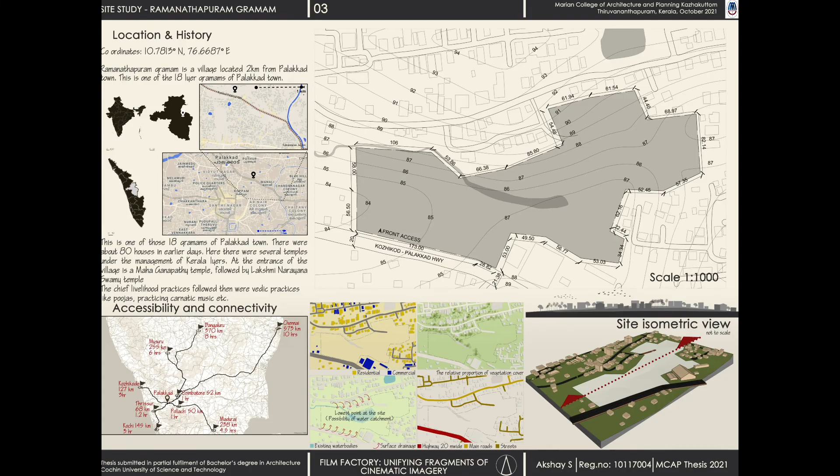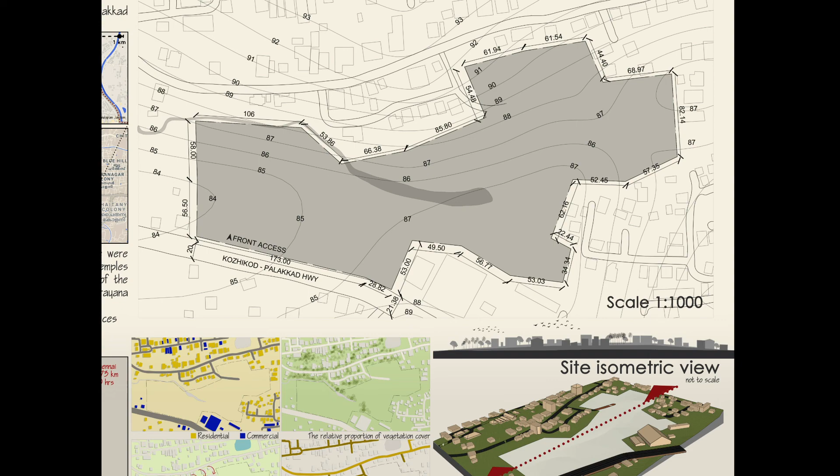Moving through the various layers of the site, the major land use from this area is that of residential as we move north and south of the highway, and those near the highway are commercial outlets, particularly vehicle workshops, warehouses, storage units and so on. All the barren land around this region is covered with grass, and the only shrub to tree vegetation found in this area is that of residences. The site happens to be at the lowest point within the region. There is a presence of a small water body at the center of the site, which is a micro catchment of water.

Considering the circulation around the site, it is accessible from the southern and northern sides. The entry on the southern side is the primary entrance adjoining the highway, and the entry on the northern side is the service entry to the site. Looking at the micro context of the site, the Iyer village is presently the residential commercial mixed use area.

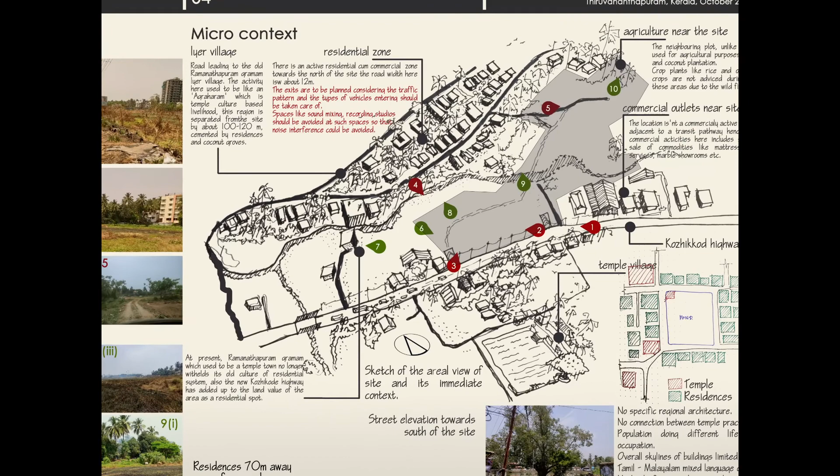These areas are 100 to 120 meters away from the site, which used to be an agraharam having a temple settlement. The active residential zone that replaced the Iyer village leads to the service road onto the site. The road is about 12 meters wide here. The exits are placed considering the traffic through the road.

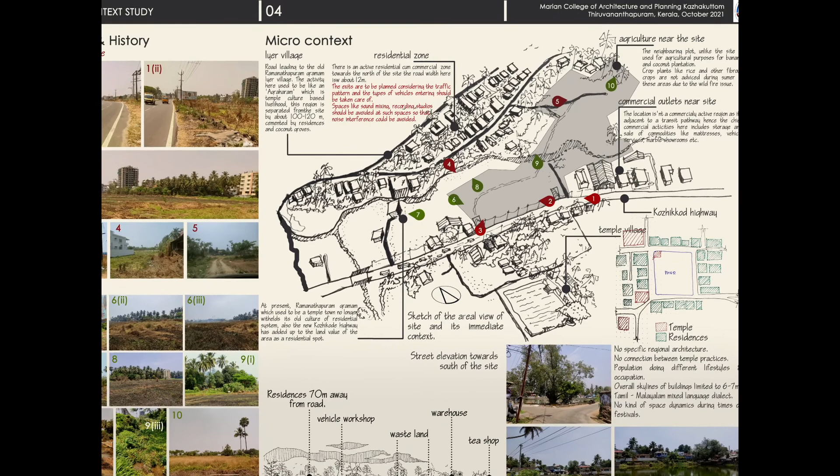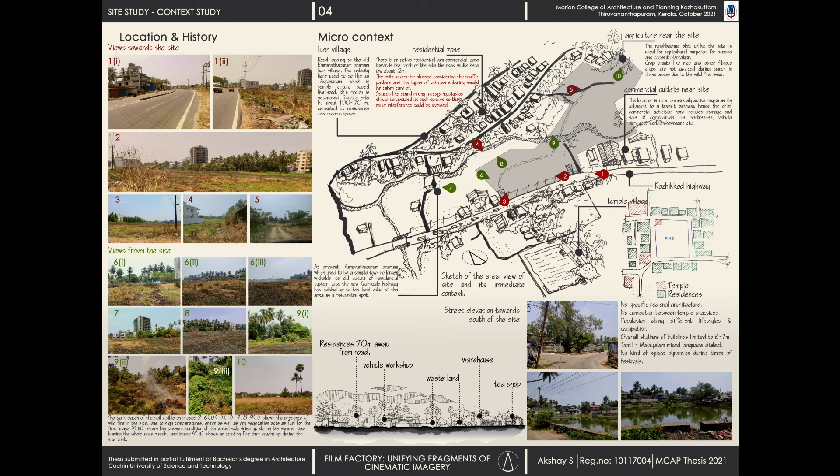The edge conditions to the northeastern sides are defined by agricultural fields that primarily grow banana plantation and coconut groves in it. These don't have a specific boundary. The street edge to the south of the site is shown in sketches that show the pattern of commerce in the region. The active temple town to the south of the site is about 135 meters away from the site, and the housing layout here is arranged around the temple pond. These areas don't follow a specific architectural pattern. The images numbered in red show the views towards the site and green shows views from the site.

Now, considering the climatological aspects of the site, the dominant wind direction is west-southwest with an average wind speed of about 60 to 80 km per hour. The counter direction gives the local winds of breezes at lower levels. The openings are placed based on this. The general climate of Palakkad follows a hot and dry pattern. The average temperature around this site is 30 to 35 degrees Celsius. During hot summers, the grasslands catch fire. The vegetated areas tend not to catch fire.

The sun study shows the area receives lighting to a level that it could be used for solar power generation for the facility's use. The pattern of shading also has been found based on sun study. From all the site-specific data and analysis, I arrived at the strength, weakness, opportunity and threat of the site. The strengths were easy road access to nearby major cities that host movie production, and the presence of nearby local movie shooting locations within 5 to 60 kilometers.

The weaknesses were the climate and atmospheric conditions that are hostile considering human comfort. The temperature soars as high as 40 to 50 degrees Celsius in peak summers. The fifth slide shows the extent of the fire caught in the grasslands over the peak summers. The opportunities were the views of people nearby the site. The region is commercially less active, although the potential to harness various cottage industries is more. Such a project in this region might act as an urban plug-in that awakens the transit pathway.

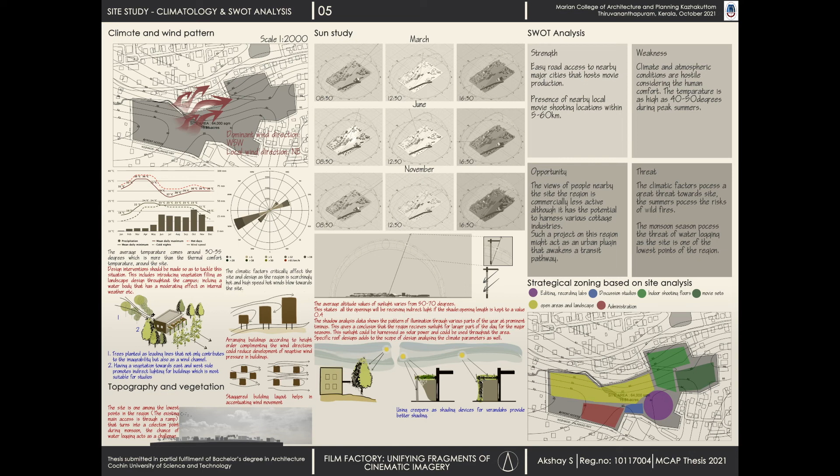The threats to the site are again the climatic factors, which pose a great threat. The summers pose the risk of peak wildfires, and the monsoon season here poses the threat of waterlogging as the site is one of the lowest points in the region. The strategic zoning based on site analysis is as shown in the figure.

Now moving on to the case studies, each case study was done based on certain aims and objectives. These were divided as film cities and film studios based on their designs. Ramoji Rao Film City, Hyderabad, designed by architect Nitish Roy, is the largest film city in the world. The aim of studying this project was to understand the site zoning, tourism management and cinema shooting within the facility. The image shows the site zoning. The spaces are presented in order of circulation followed by a tourist user visiting the facility.

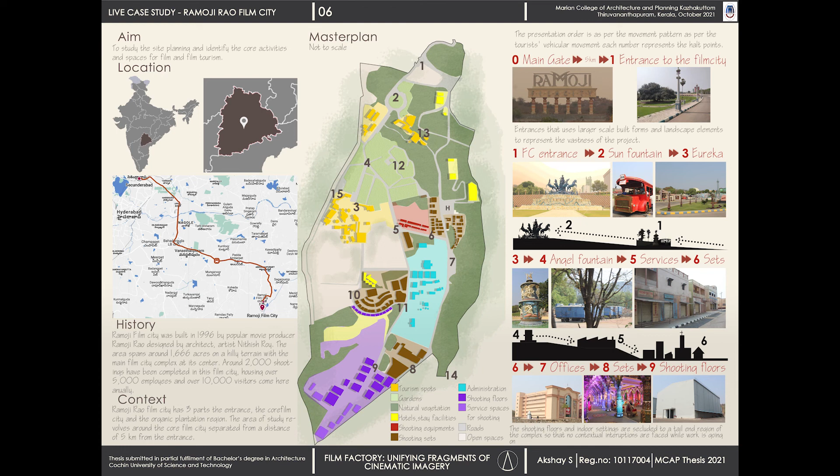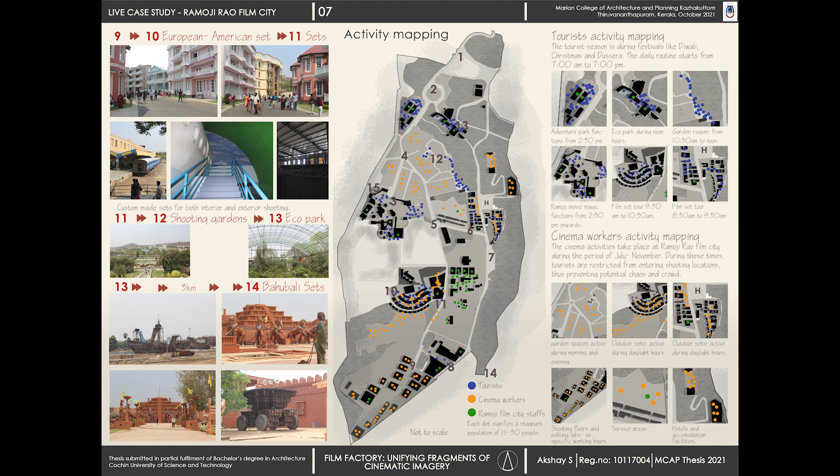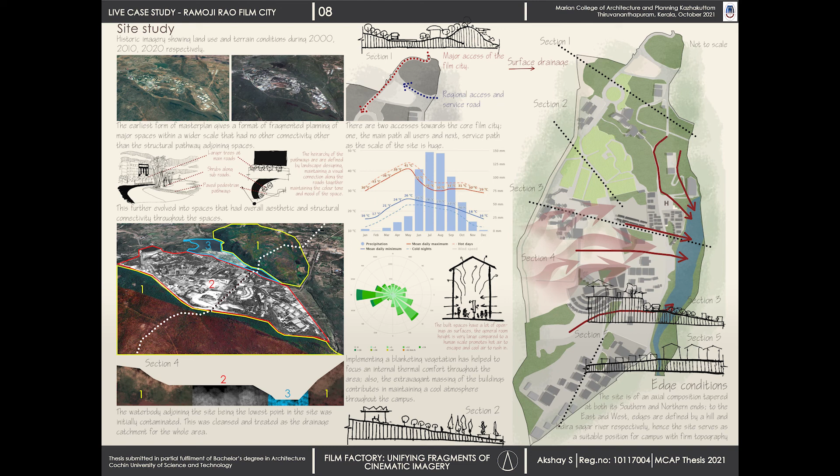Moving on to the spatial analysis, the exterior spaces studied were the gardens and the landscape designs, which acted as a venue for both shooting and tourism. Each of the landscaped areas within the campus has multi-visual access so as to facilitate the movie shoot as well as improve the tourist visual experience. The gardens were made from different gardening styles across the world. Considering the interior spaces, the indoor shooting venues were studied, which had fixed design parameters like height, services and structure.

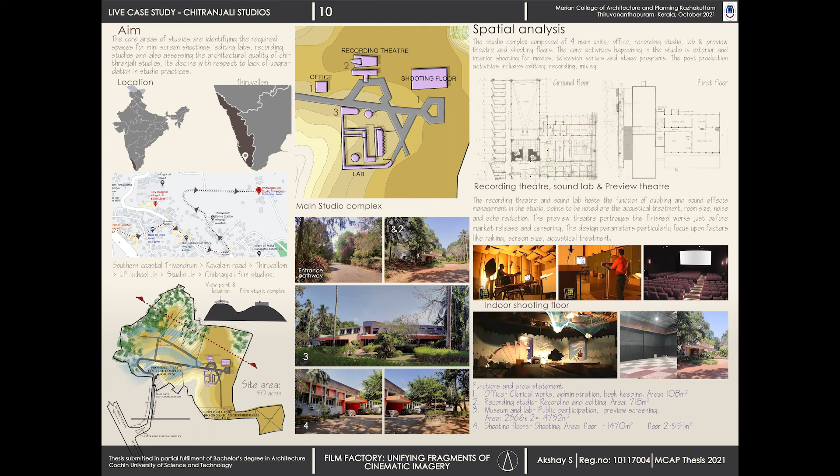The third case study, Disney IM Digital Studio, situated in Novato. The core idea of this project was to study the subunits of post-production that included color labs, VFX studios, concept studios, dark and light spaces for editing. Also, the circulation system for this project showed a pattern of presentation which is used in the main design.

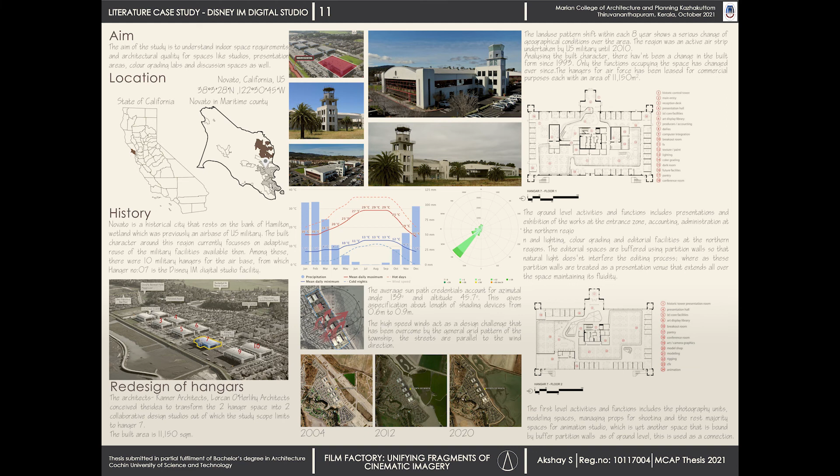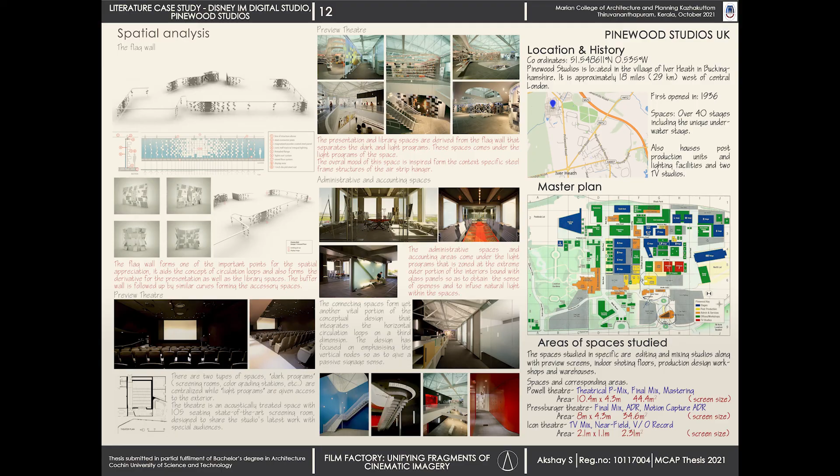The next case study, Pinewood Studios UK, helped me to understand the requirements and services of indoor shooting floors. Pinewood Studios deals with indoor shooting and post-production that is much similar to my project brief. It consists of different types of shooting floors, editing and recording studios based on each requirement. Each of these requirements were studied and the spatial requirement in terms of quality and quantity were separately assessed.

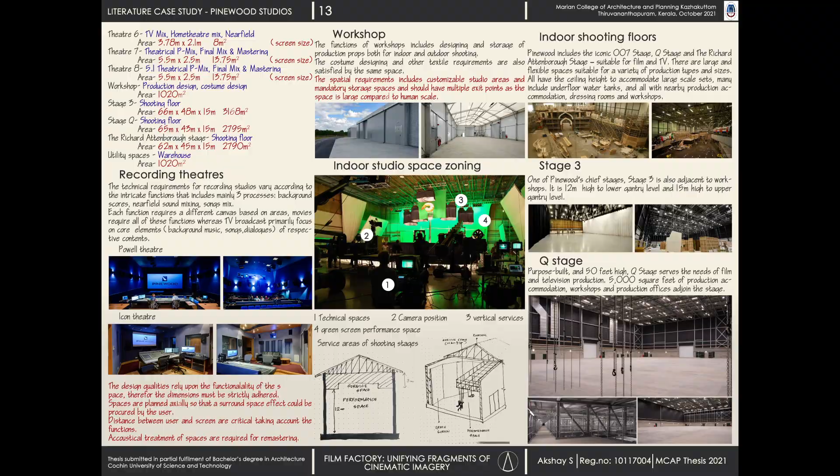The second film city under the case study, Dada Saheb Chitranagari, Mumbai, or rather known as the Mumbai Film City. The aim of this project was to study the site zoning and identify the range of mini-screen activities for a film city. The key functions and scale of projects done in Mumbai Film City are as follows. The facility hosts mainly two functions. These are film tourism and exterior and interior shooting of movies and mini-screen programs.

The infrastructure facilities include exhibition venues, shopping spaces, restaurants, accommodation facilities, about 40 outdoor and indoor shooting sets, 16 indoor shooting floors, editing studios, dubbing, sound mixing studios and offline office spaces. About 520 acres of land consisting of hills, valleys, plateaus, natural forest, bushes and wetlands. The overall zoning pattern is based on a linear pattern where the individual spaces appear as branches from a central avenue pathway.

The last case study, Prayag Film City, Kolkata. The aim of studying this project was to identify the site zoning and identify the range of mini-screen activities for a film city. The film city hosts two main functions, which are film tourism and exterior cinematography. The general planning and zoning of the whole campus is based on a radial zoning concept, where the key idea is segregating spaces that diverge from a central node.

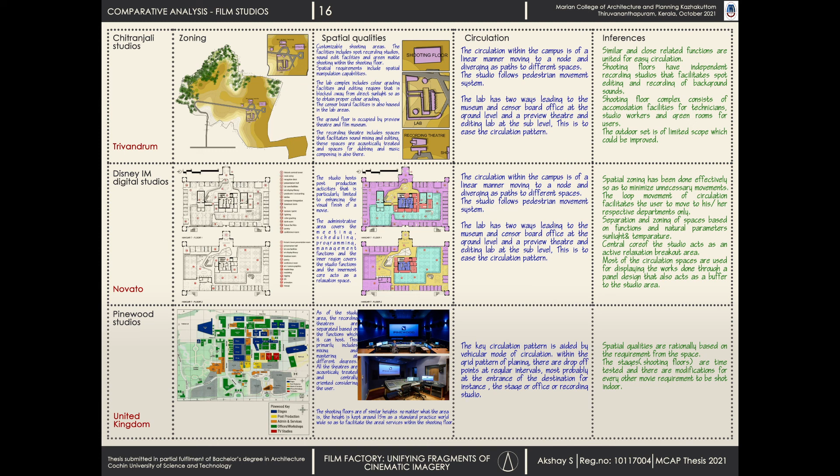Coming on to the master plan, as the figure shows, the site is divided into levels 83.5, 85, 87, 88 and 89 meters above sea level. The lower levels, which are to the west side of the site, contain spaces for pre-production and post-production, with spaces 1, 3, 4 as administration building, post-production facility and concept studio.

This level has its landscape counterparts as 5, 18, 17 as the central node garden, maze garden and agricultural area respectively. The vehicular parking is shown in green and vanity parking is shown in violet shades. The total parking slots required for the facility as per KMBR is 55 for the post-production facility, 10 for the administration office and 25 for accommodation.

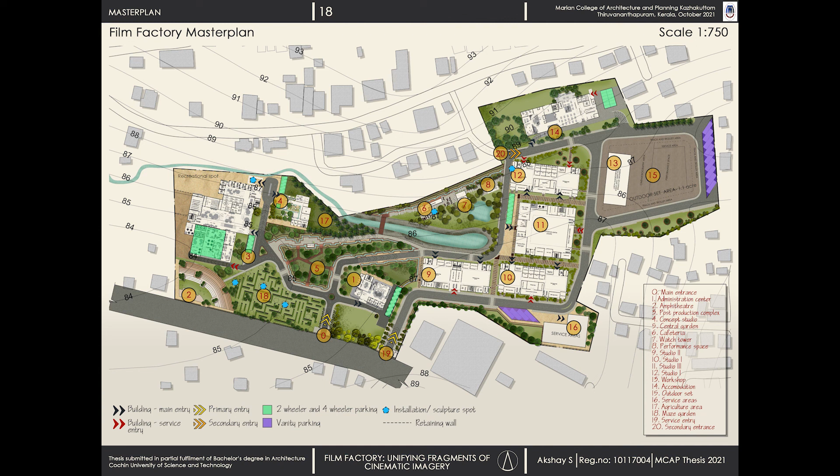The shooting floors coming under the industrial building are attached with a common parking lot towards the east side of the site. The upper levels of the site are zoned for the production area for the shooting floors and accommodation facility. Getting in detail to the zoning layers, firstly the landscaping scheme was followed up by 3 gardening styles: the maze garden, the central node garden and the forest landscape.

The pedestrian pathway connecting all the spaces, the built and the unbuilt ones, is staggered at regular intervals so as to attain numerous different architectural frames, which is part of the special topic. Coming back to the gardens, the maze garden is a gardening scheme inspired from the 1980 Kubrick movie The Shining. This was intended to give a surprise, revealing to the viewer a set of installations within the garden. From its functional point of view, it leads to the amphitheater performance venue.

The central garden is a nodal garden that separates the car and pedestrian pathway. This was designed understanding the significance of a focal point in a campus. The forest landscape connects the pond and the shooting floor. It forms the main trail along the site area. Hence, the truck route was zoned at the peripheral region of the core campus. The car and pedestrian pathway is interlinked until the post-production facility, which then splits into two.

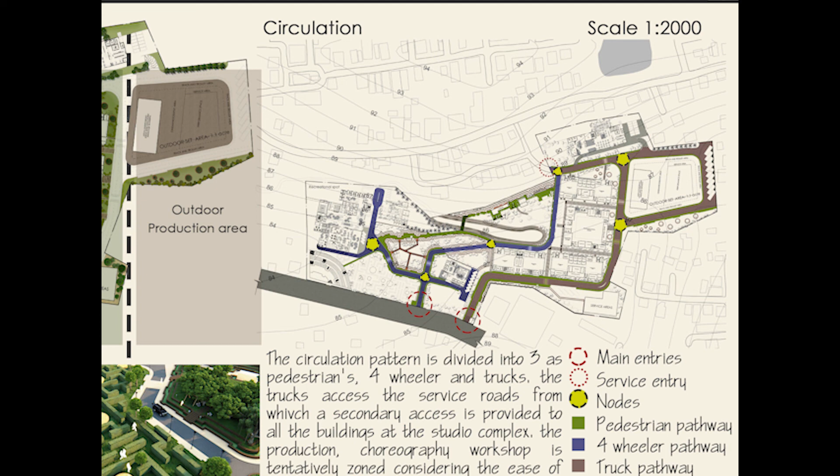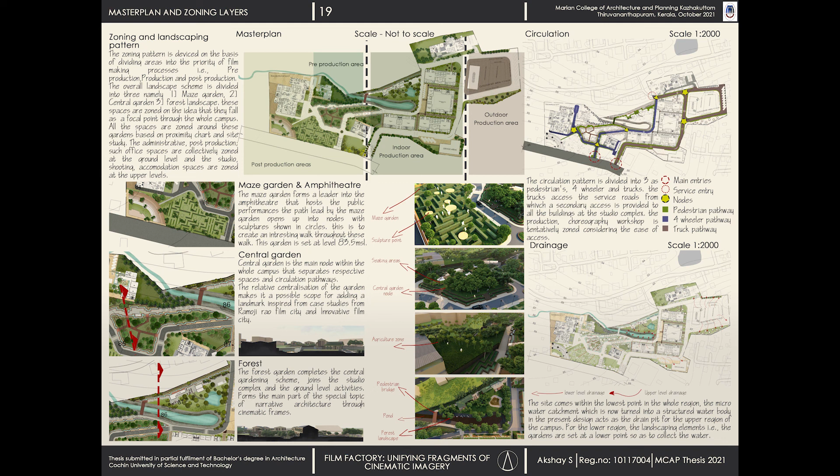The pedestrian pavement throughout the campus is staggered at 10 to 15 meters for truck path, 5 to 7.5 meters for car path, and 2.5 to 5 meters for pedestrian path for attaining different frames as mentioned earlier. The site comes within the lowest point in the region. The micro catchment came because of this. So as a precaution, this landscape is kept under boundary and no built form is zoned near it for a minimum of 5 meters.

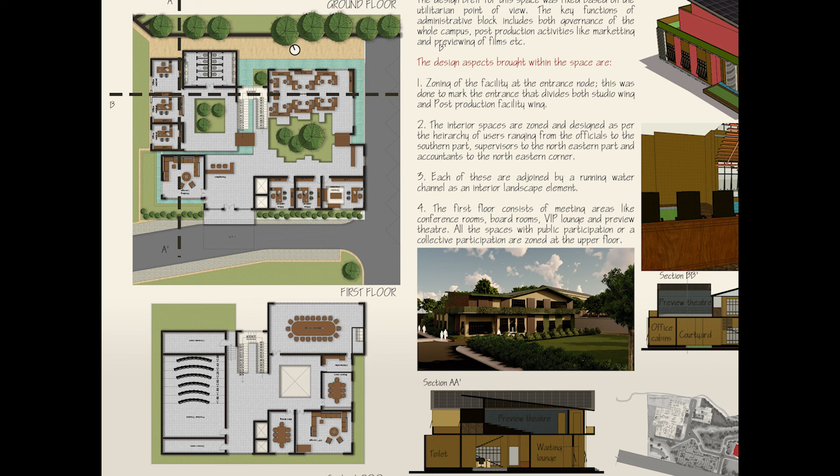The core activities within the administration building are governing the whole facility, marketing films and previewing. The design ideologies for zoning were solving these activities as a working office and meeting area spatial requirement. These were zoned on to ground and first floor separately. The official space hierarchy is segregated through the internal water body, splitting the office into accounting, supervising and board directional area.

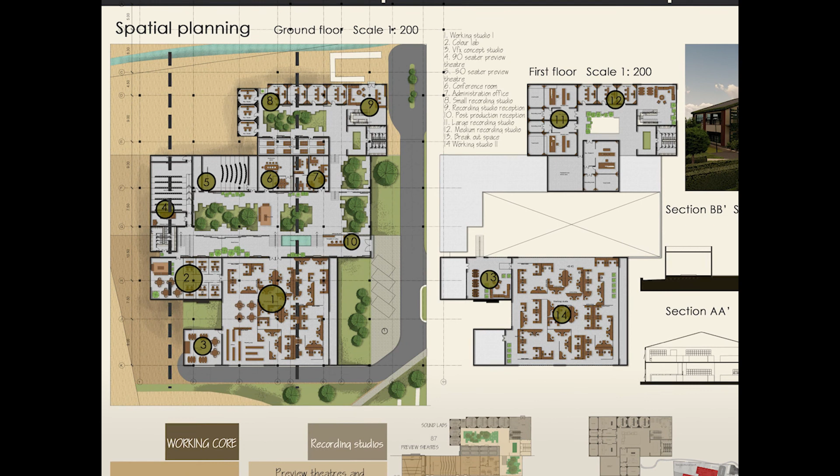The post-production area is the part of the design where most activities come under one roof. The functions within this space were the VFX studios for movies, color grading labs, VFX concept studio that has motion capture tech, preview theaters, its local administration, and finally the music section. These are separated and classified as public and core work activities based on public interference in it. The working studio and color labs come under the visual working core. About 180 people are the population size for this activity.

The working studio requires its own secluded atmosphere and classic studio processes. The color lab is a light obstructed area for better functionality for editing. This space has individual consoles so that at a time 6 movies' color grading could be done simultaneously. A transition lobby connects the working core and the public areas. There are 2 kinds of theaters within the facility: the smaller one, 50 seaters, for local previewing, and a 90-seater one for the final previewing. The administration area also includes a conference space within it.

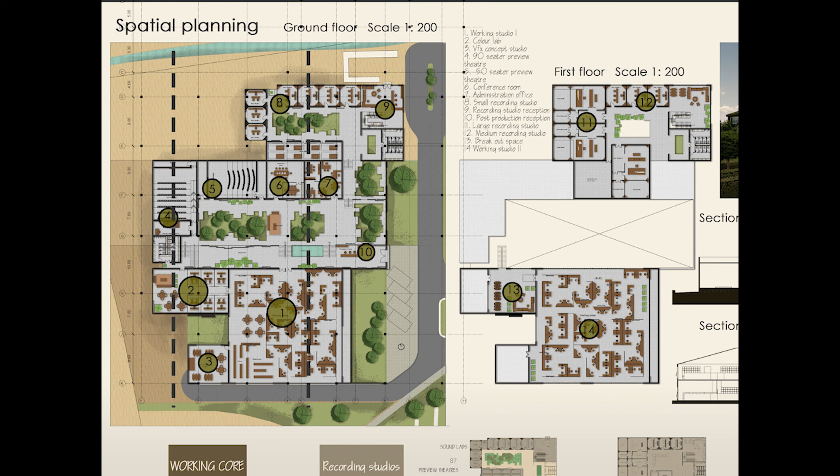The music studio is the next working core placed at the top level within the facility. Based on requirements identified from standard practices, the recording studios have been classified as type 1, 2 and 3. The first 2 are for adding fine and background details, whereas the third one on the upper floor deals with all recording and mixing processes. The section shows the contour manipulation of the facility.

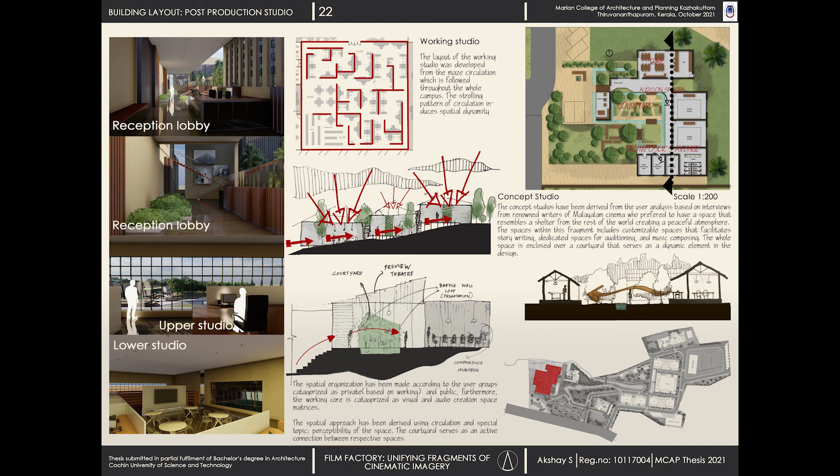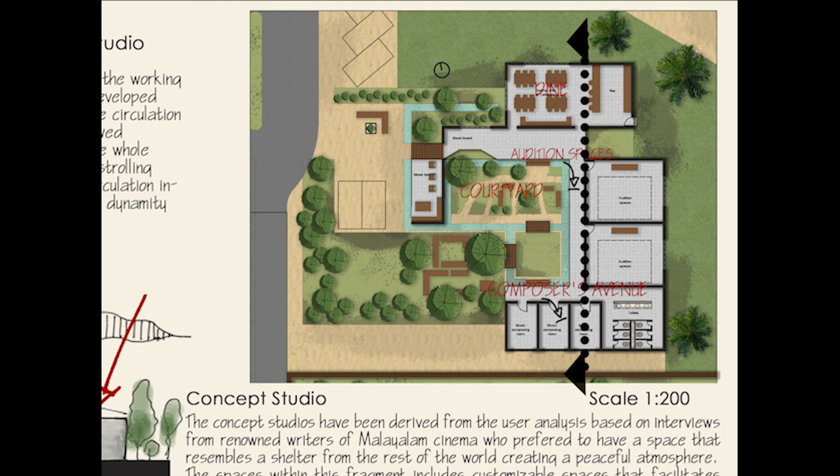Moving to the next set of spaces, the indoor shooting floors. These were divided into 3 based on their individual functions. These functions are addressed as follows. Studio functions host the functions of reality shows. The space requirement here is that of production storage and makeup space for participants. The circulation followed in this system is made more convenient so that back-to-back performances could be easily done.

The shooting floor 2 holds the function of mini-screen programs like talk shows and teleserials, which primarily focus on having a permanent fixed environment, which is the props used for shooting. A longer proportion of floor size is required for this space, adjoined by smaller ancillary spaces. The common space in this system is only the backstage console.

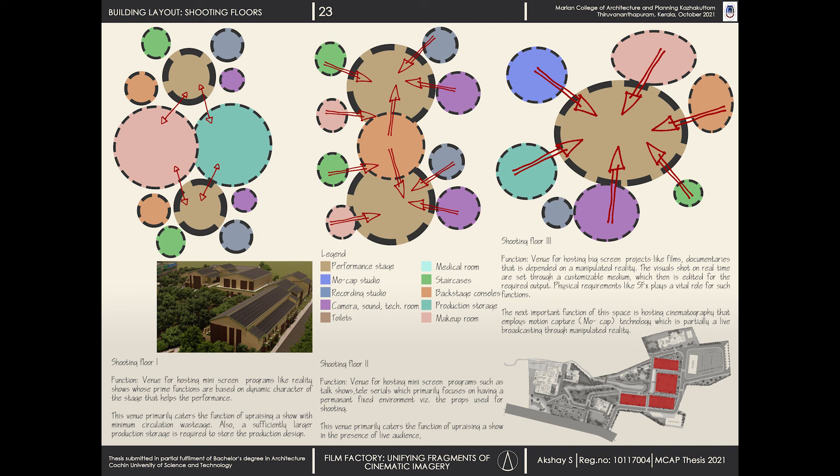And finally, moving on to the production shooting floor 3. These are venues for hosting big screen projects like films and documentaries that are dependent on a manipulated reality. The visuals shot in real time are set through a customizable medium, which is then edited for the required output. Physical requirements like SFX play a vital role in such functions.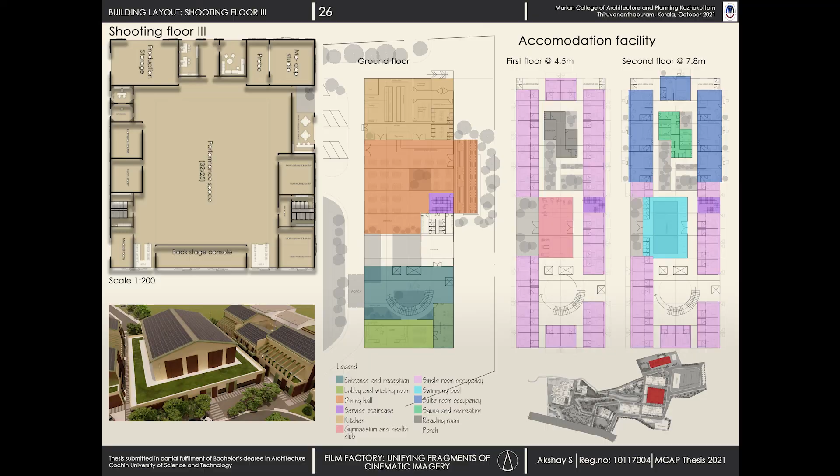Now, moving on to the special topic. The idea of imageability involves creating a campus using architecture tools like paths, edge, node, and landmark to define a logical storyline within the whole campus. The method used in this design is creating cinematic architectural frames. For this, the tools used are serial vision, static and dynamic contents interrelation with frame, and principles of composition.

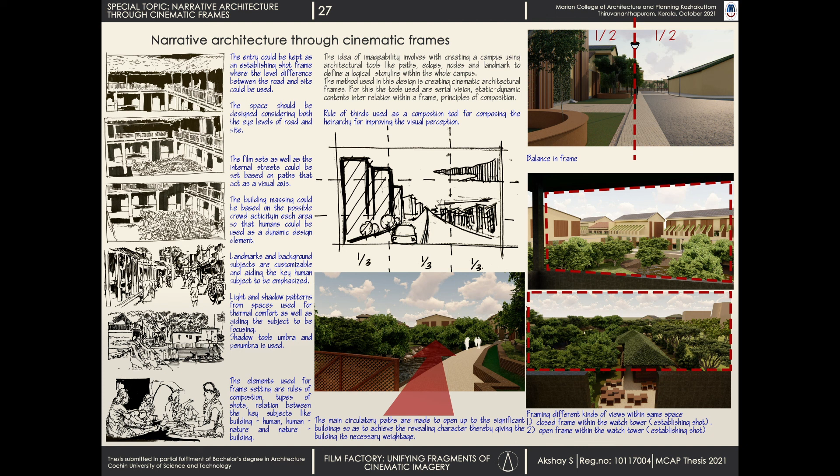For instance, the entry could be kept as an establishing shot frame where the level difference between the road and site could be used. The space should be designed considering both the eye levels of the road and the site. Film sets as well as the internal streets could be set based on paths that act as visual axis. The building massing could be based on possible crowd activity in each area so that humans could be used as dynamic design elements. Landmarks and the background subjects are customizable, aiding the key human subject to be emphasized.

Light and shadow patterns from spaces are used for thermal comfort as well as aiding the subject to be in focus. Shadow tools, umbra and penumbra, are also used for this. Now, explaining the concept of cinematic narration. Cinematic narration actually contains 2 subunits, the narrative and the narration. The narrative is the material factors within the narration, that is the static and dynamic elements, which are buildings, humans and nature, tangible and intangible effects that change the mood of the narration.

Secondly, narration is the concept of storytelling, the method in which the perceptibility is done in a free-flowing manner using specific methods of storytelling. Usually in cinema, the renowned storytelling methodologies, butterfly effect and Rashomon effect, are used for building the narration. The butterfly effect, the small change that builds up into a large impact, is the property of a system in which small changes in initial conditions can lead to large-scale unpredictable variation in the future state of the system.